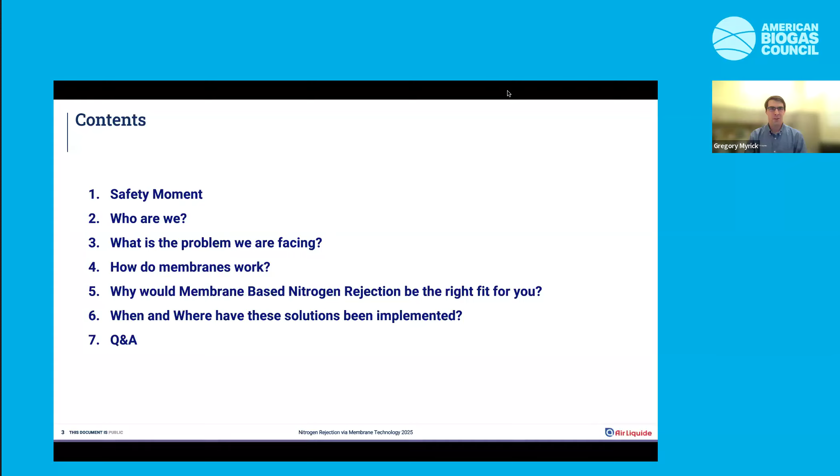Go ahead, next slide. Next slide.

So for safety in a landfill, flammability and fire is really our main challenge. You need 3 main things to start a fire. You need a fuel source, landfill methane. You need a heat source, a thermal oxidizer or a candlestick flare that's typically on site. And then you need oxygen. Oxygen comes from pulling vacuum on the well field and that air intrusion. So with the nitrogen that you're building, the oxygen is coming with it. And with that becomes a very serious safety risk.

So typically biogas upgrading technologies concentrate methane by removing CO2 and oxygen. In that concentrated CO2 and oxygen stream, you have the potential to create a very serious situation. So the dark blue dot on the right side is a typical landfill feed gas composition.

That blue line running through the flammability triangle is going to be air in the presence of methane. The bottom of that is pure air - 79% nitrogen, 21% oxygen.

So when you have air intrusion, you're taking that dark blue line and dragging it down to the bottom. When you see that dotted line go through the dark orange triangle, you are in a potentially flammable environment, which is really dangerous, because once you're in that flammable environment, all you need is an ignition source.

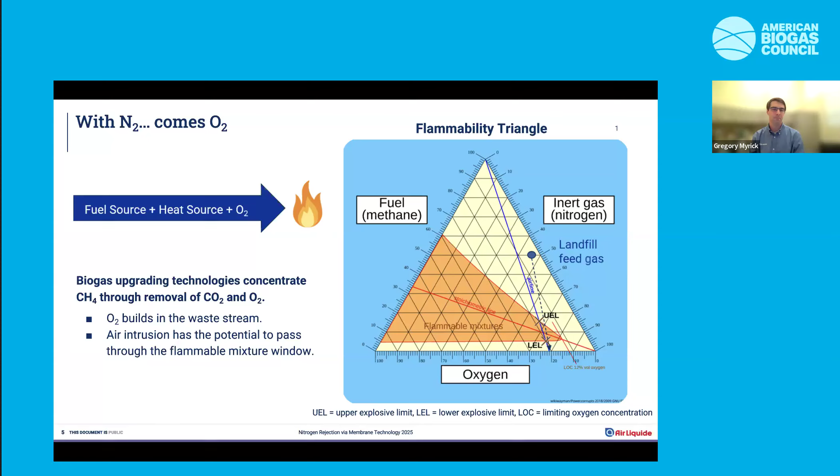Next slide. So a little bit about Air Liquide and why we're in the biogas space and how we're contributing to the environment.

At Air Liquide, we have a division called Advanced Separations. This is a membrane manufacturing and membrane solution development group for the industry, in biogas, natural gas, helium, hydrogen, and nitrogen mainly. We manufacture a hollow fiber membrane that's effectively the size of a human hair, but has a hole down the middle. I have an example here of one of our membranes, a little bit exploded, but fun to look at nonetheless.

At Advanced Separations, we develop our own fibers, new formulas, and membrane modules, as well as apply them to new technologies and applications wherever we can. Our research and development is here in Delaware, where I am sitting right now. We have over 37 years of membrane production experience.

Everything we manufacture that gets sent globally is manufactured here in the US. We have over 10,000 purification units in the areas I mentioned before: helium, hydrogen, biogas, nitrogen, and natural gas.

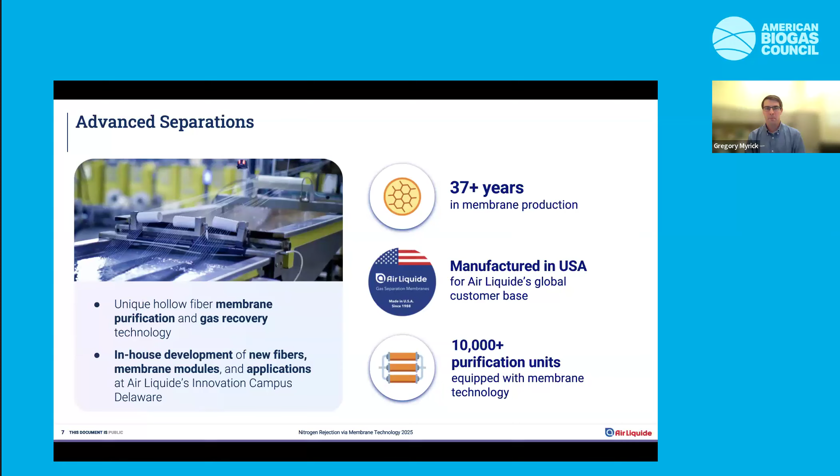At Air Liquide, we're really focused on driving innovations. Jonathan very graciously mentioned some of the innovations I've been involved in, but Air Liquide is very keen on how we can drive innovation in the market.

So our membranes are on land in a landfill, in the air, potentially on an airplane you've ridden on recently, and in the sea in an FPSO, which is a floating production storage and offloading unit for natural gas. Here are a couple of the achievements we've had in the last couple of years.

In addition to using AI in our manufacturing process and developing new membranes, we have our standardization initiatives, which you'll hear more about in the coming months, and which will really roll out fully next year.

In natural gas, we are focused on recovery of natural gas from oil refineries, and in hydrogen, huge improvements on recovery as well. For nitrogen and helium, we're focused on lowering the cost of recovery for both. And then there's the discussion we'll have today on nitrogen removal for biogas, with a lot of really exciting innovations coming out by the end of this year and next year in the biogas space that we're really excited about.

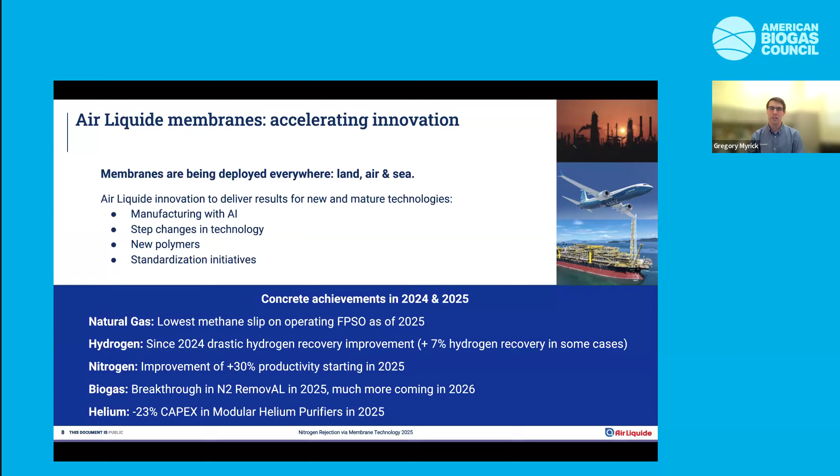At Air Liquide, we are involved in the whole circular innovation strategy - research and investigation here in our Delaware Research and Development facility, where we're developing new polymers.

That then goes to our production facility in Newport, Delaware, where we focus on lead time and ensuring product quality for our customers. We have an in-house engineering and design team, so we develop and design the skids ourselves and work on providing the best performance we can for our customers.

Then finally, we bring that into the field with our field service organization, which is focused on providing the customer the best membrane support that we can, tuning those membranes when they're running, and optimizing gas production.

What's really fun and unique about this strategy is we can use the engineering and design and the field service to feed back - where can we improve in polymers? Where can we improve in our engineered design? How can we provide the best value to the customer? Having that circular loop really helps us provide the best end result for our customers.

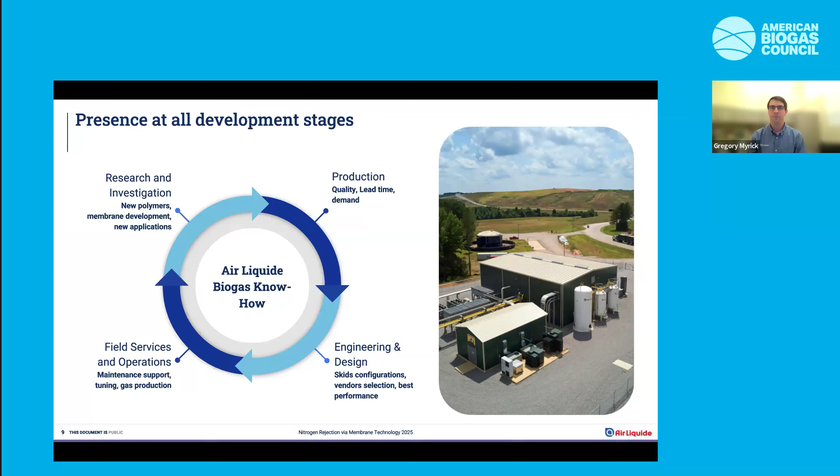At Air Liquide, we have over 250 worldwide references in biogas. Here are our references in North America, and we've been doing this for the past 20 years. All of these dots are sites where Air Liquide equipment is in the biogas space.

So we have yellow, which is the operating facilities. We have green, which is 8 facilities running with nitrogen removal technology. Finally, there's blue for sites in development, some of which have already started up. Then we have purple and red, which are our manufacturing facilities as well as our corporate offices.

So spanning across the US, I've been fortunate enough to be at a lot of those sites and try to help out and tune the systems as much as possible, and continue to grow this portfolio of projects, and hopefully add a few more of those green dots as we continue to grow this technology in particular.

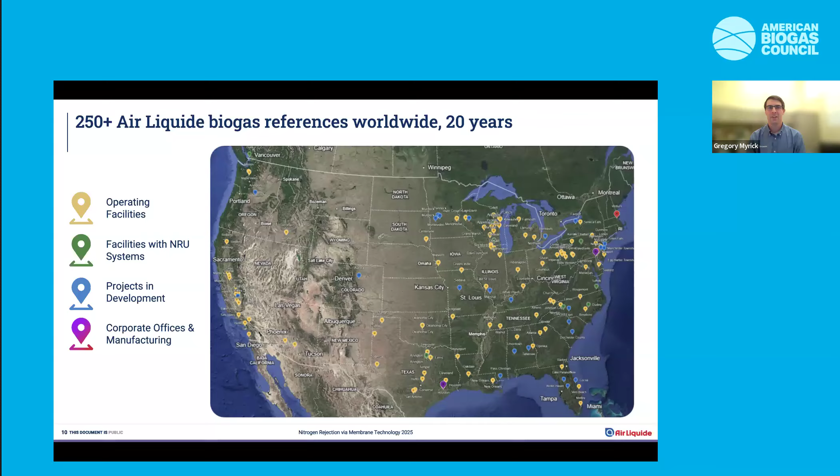So what is the problem that we're facing in the biogas space? It's really a nitrogen problem. Separating methane from CO2 is relatively easy—there's a lot of technologies that can do that. Separating methane from nitrogen is very difficult. So one of the biggest concerns and the largest CapEx and OpEx involvement in these projects is typically in nitrogen removal.

So where is the nitrogen coming from? It's really a landfill problem more than it is a digester problem. In a digester, you have better control over the nitrogen. In a landfill, it's a function of pulling vacuum on the wellhead.

There's a little picture from the EPA of a wellhead, and the example is: the cap that the wellhead is protruding through is pulling vacuum on the tube that's going down into the waste and drawing in the methane from the waste. So when it does that, if you pull too hard, it's also going to bring air from the atmosphere through the cap into that collection well. That's really where the problem comes from, as well as if you have an open landfill, the open face additionally brings in some nitrogen.

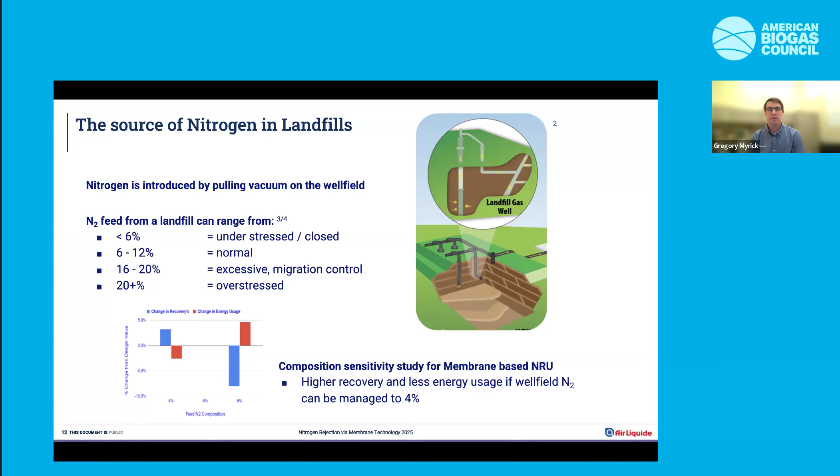So let's get into what are the commercially available technologies. Next slide, please. Next slide.

For a membrane, similarly, rather than pulling vacuum on the low pressure side, we need to boost the pressure prior to treatment, and that helps with CapEx considerations and keeping the footprint nice and small. So while it's similar in relation to the equilibrium PSA from a compression standpoint, the footprint is really the added benefit there.

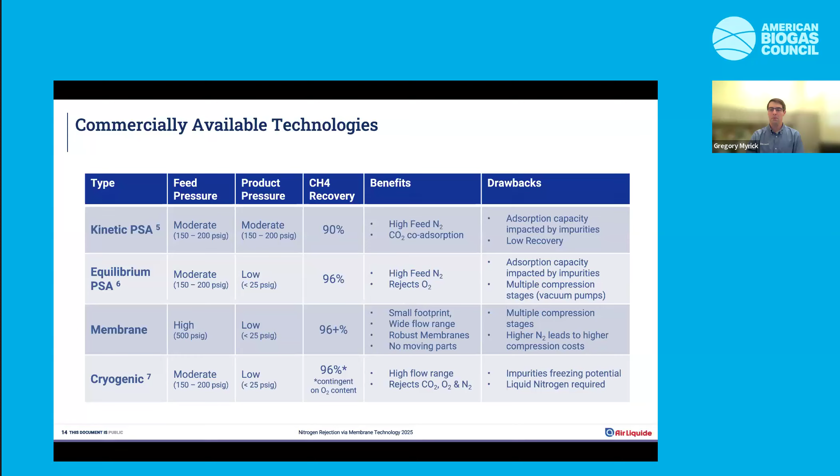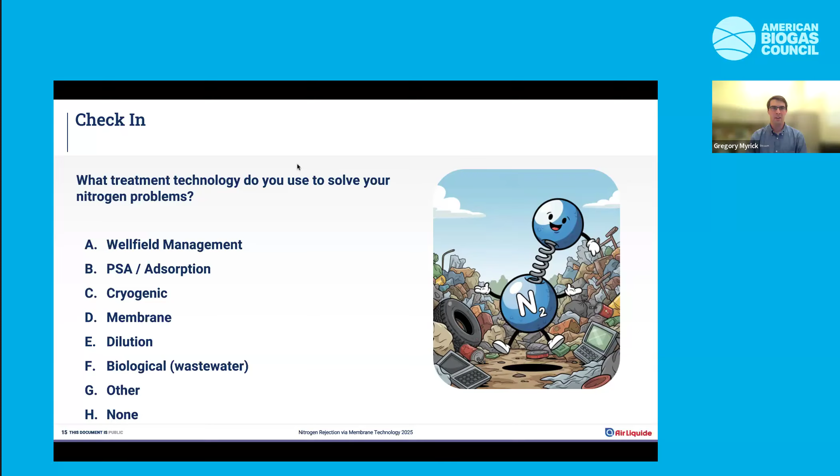Next slide, please. All right, so a little bit of background on membranes. We're going to touch on what is a hollow fiber and how does it work, and then specifically nitrogen removal membranes. Next slide, please.

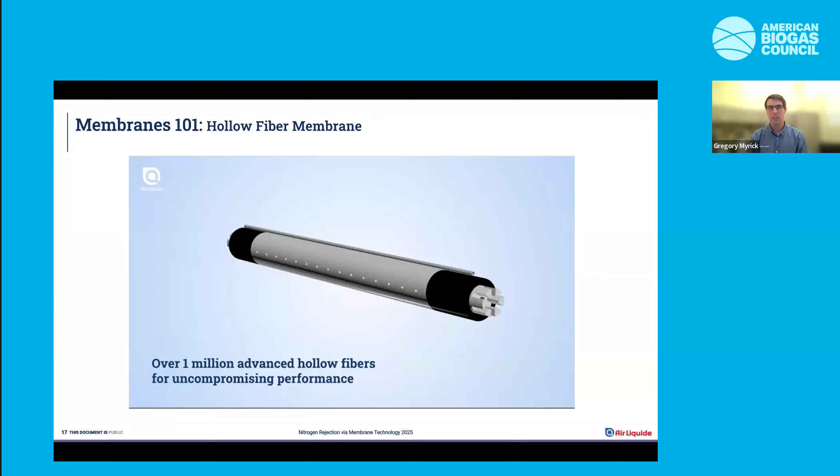Got a nice little video for you. So this video is specific to nitrogen solutions, but it is applicable to how a hollow fiber works. So we have this center tube, which adds structural stability, and then we wrap the membranes or the hollow fibers around that center tube. As I mentioned before, each one is the size of a human hair, and very small.

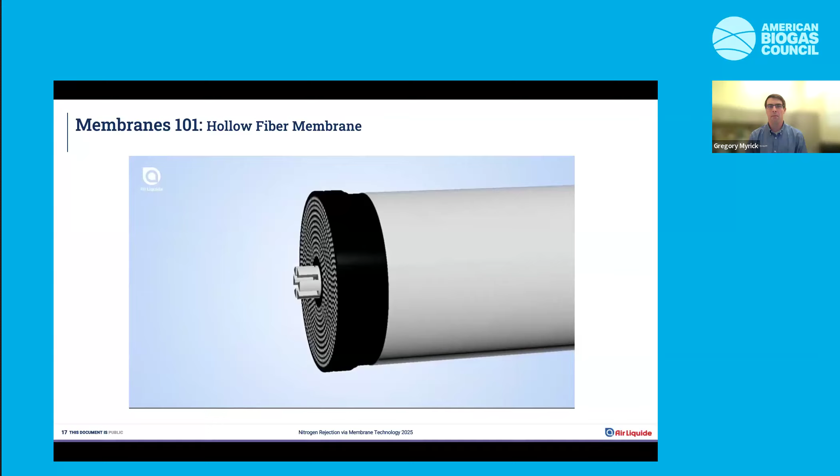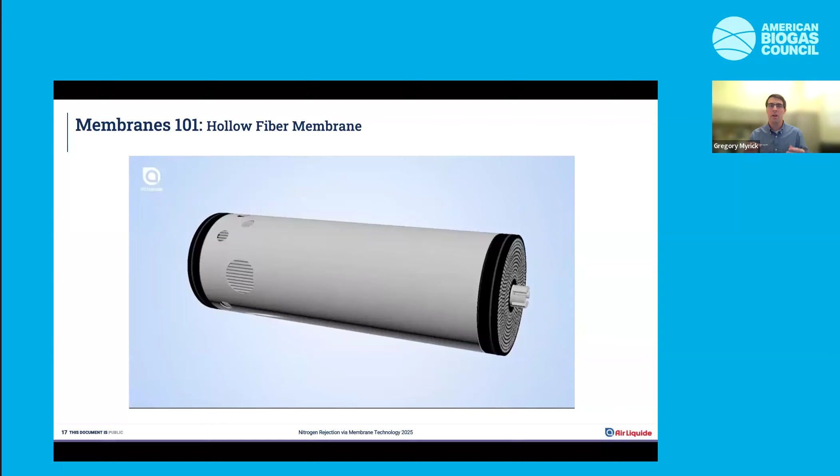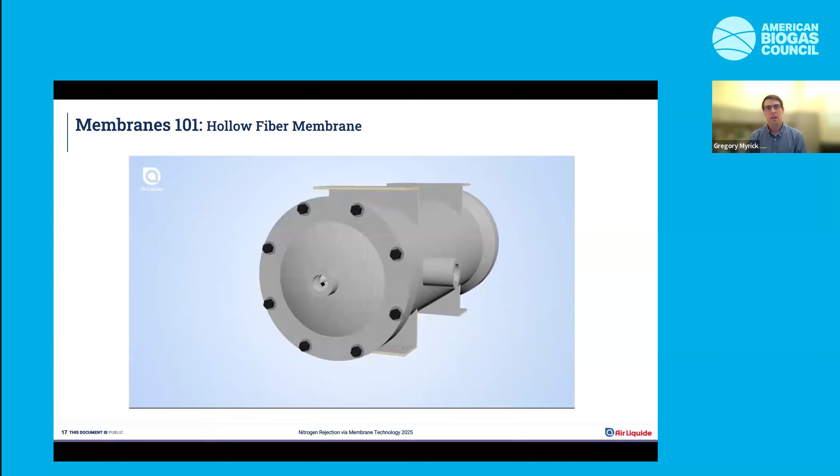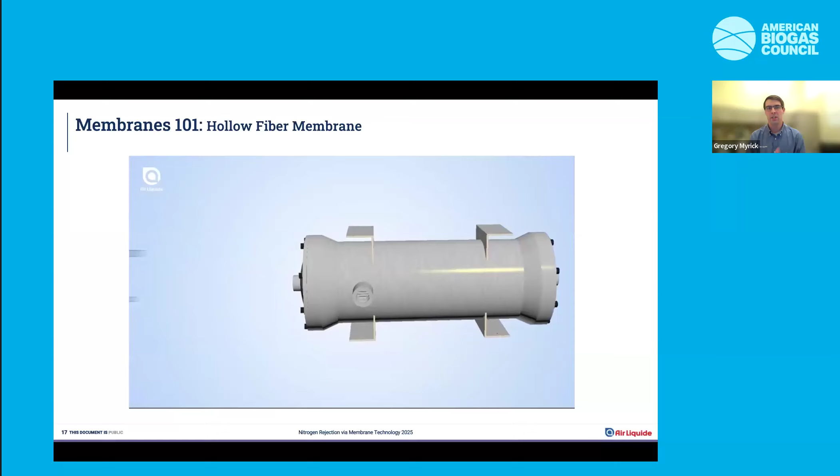Here we have O-rings that are keeping the high pressure side from the low pressure side. So the high pressure is going to go down the bore of the fiber, and then it will permeate across the membrane wall that's at low pressure. This is an example of our 12-inch housing that in some applications we can have up to 24 bar pressure. In biogas, you don't typically run that way. And then it's zinc chromate plated to improve corrosion resistance.

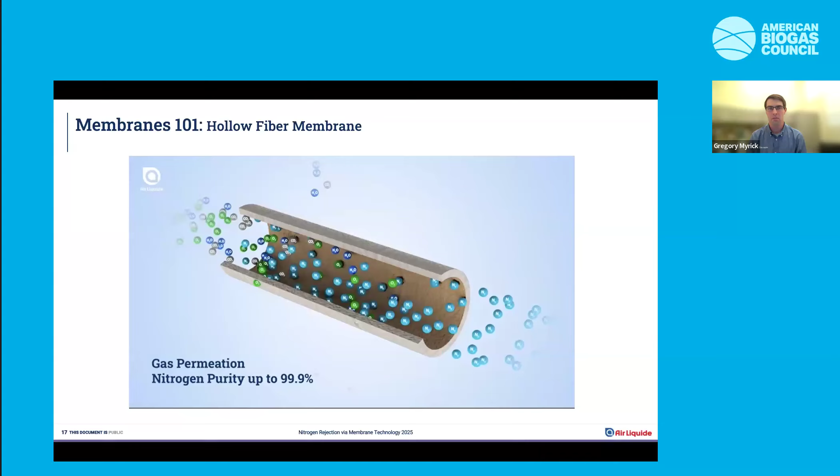So as we take a snapshot into a fiber, you can kind of see the gas is going down the bore, and then our fast gas, the example of a fast gas here, is going to pass through the membrane wall, and our slow gas is going to stay along the fiber. So I said this was air service, so the air is going to be our landfill gas. Nitrogen is going to be our methane gas in biogas service, and then O2 is going to be CO2 and oxygen that permeates across the wall.

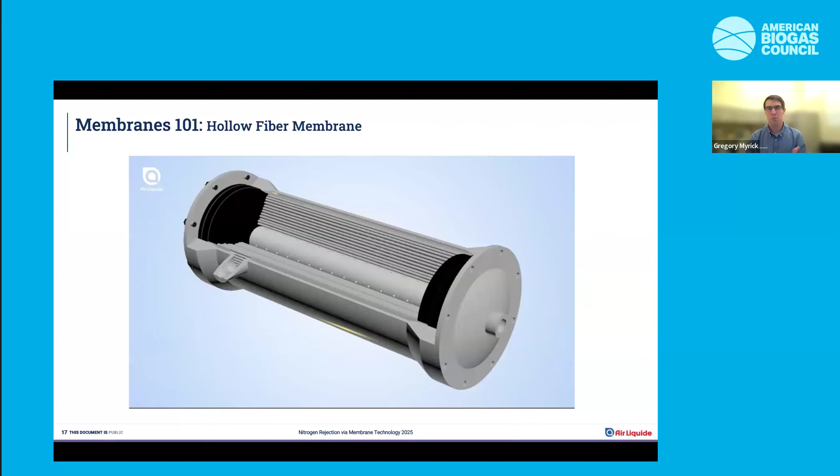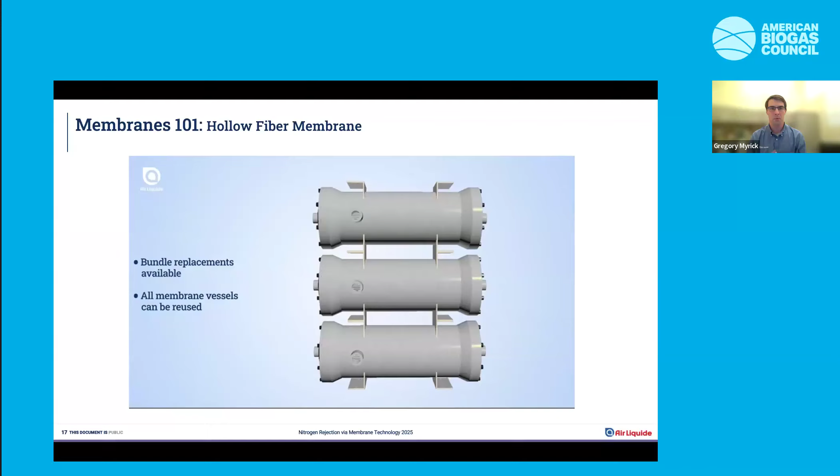But just to give you a flow dynamic perspective, the membranes are easy to replace how we've designed them. We have installations that have nearly 20 years of run life with the original membranes. Typically, we say 10-year membrane life, assuming proper pretreatment and protection of the membrane.

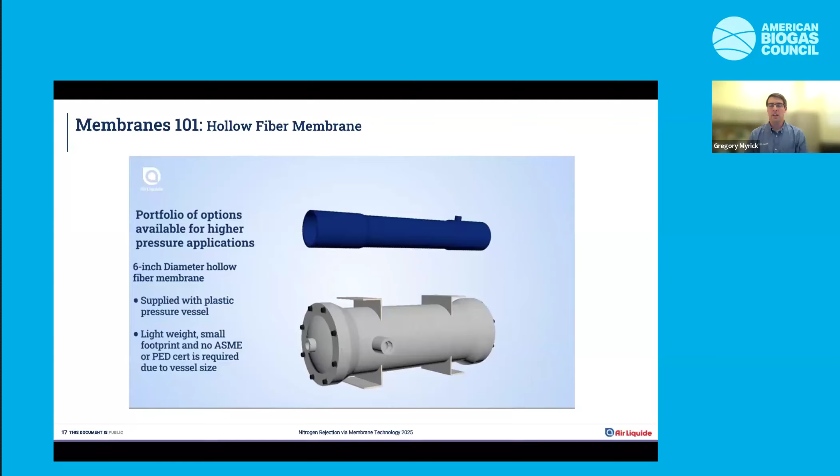We also have a 6-inch variation here. And so, wanted to highlight that with the proper pretreatment, you can keep these membranes for quite a long time. The 20-year reference is an Air Liquide owned and operated site that we've had since 2007, nearly 20 years. Next slide, please.

So how this differs slightly from our nitrogen removal membranes. Our nitrogen removal membranes are a polyether-ether ketone substrate. This allows us really great thermomechanical properties as well as chemical resistance so that it can sustain oil contamination, VOC contamination with no loss in performance. It allows the membrane to then operate with very little pretreatment and keeps that overall cost down. This was an acquisition that we had back in 2016, and we use a proprietary coating process that has best-in-class methane nitrogen selectivity. So it really reduces the overall power consumption by having that improved selectivity.

And so with that, touching back on the chemical resistance, we've had examples where we have flooded, the process has been flooded with oil. We've taken the membranes out, cleaned them, put them back into service with the exact same performance that they had on day one. So they are very resistant to these chemical attacks and VOCs. And that really helps at the end of the day in keeping your overall cost down. Next slide, please.

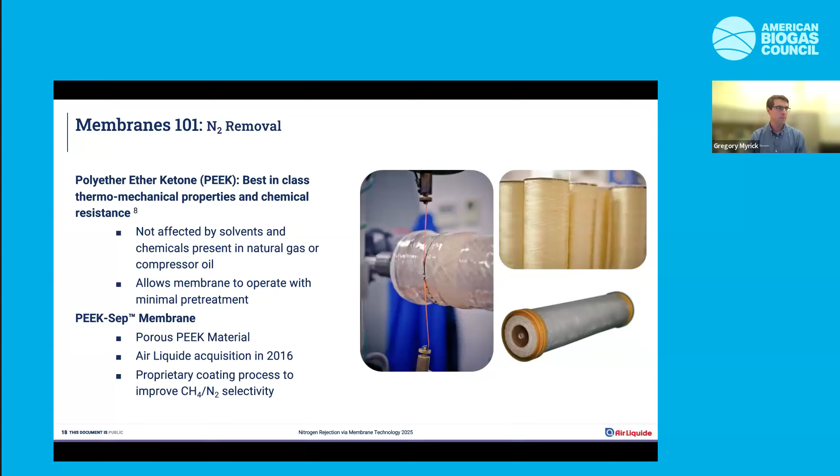So here we have kind of how does this differ from a conventional technology, conventional CO2 removal technology versus this PEEK-Sep product. So I was mentioning during the video that the fast gas is what's going to pass across the membrane wall, and then your slow gas is what's going to stay through. So in a conventional CO2 membrane, and there are many players in the market in this space, those membranes can't differentiate between methane and nitrogen. They're chemically too similar for a CO2 removal membrane. And so really we're counting on the fact that we can keep the methane at high pressure, and then the CO2 is going to very quickly pass across the membrane wall.

The difference with the PEEK-Sep products is that we can drive a wedge between the methane and the nitrogen. So we're flipping it on its head. It's keeping the nitrogen at high pressure, and we've swapped it such that the methane is now at low pressure, and we're really driving a wedge between methane and nitrogen.

A good point here is that oxygen is not shown on the graph. It will behave similarly to CO2 with these membranes, so it will permeate across the membrane with the methane. And in doing that, as you remove nitrogen, it will slightly concentrate, but not significantly. So it'll pass with the methane.

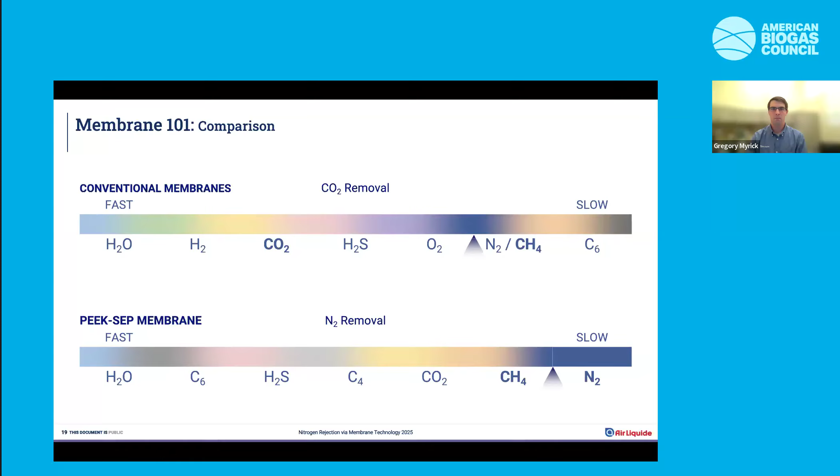Okay, so this poll is really a question of, did you pay attention? Through this presentation, this question has already been answered, so I'm excited to see how many of you are paying attention. How many fibers can we find in a 12-inch diameter bundle? Think about 12 inches in diameter. Do we have 5 fibers in there? 500, 1,000, 10,000, 100,000, a million, or 10 million fibers within a 12-inch bundle?

Okay, let's see where we're at. How many guesses? How many people have been paying attention? Majority of you, but not more than 50%. So 47%, it is a million fibers. It's about 1.2 million. 10 million would be really big. 100,000 is actually a very good guess, because depending on the fiber diameter it may change, and also depending on whether it's an 8-inch or a 6-inch bundle it may also change. So depending on the product line, where we have 6-inch, 8-inch, or 12-inch membranes, we have a variety of options for the application. Could be between 100,000 and a million.

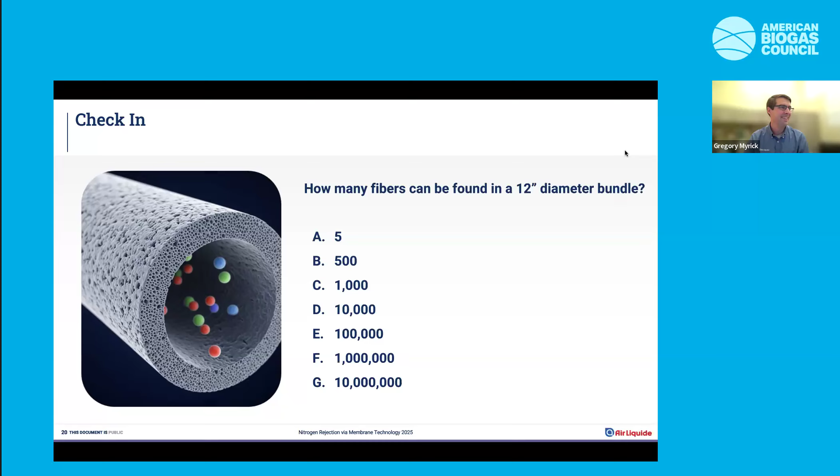All right, but majority rules, and the majority have been paying attention, so I appreciate that. Now let's get into why you're all here: the nitrogen rejection unit that we have at Air Liquide.

So we have a patented process at Air Liquide, the patent listed there and shown in the diagram below, where we are taking our landfill gas, processing it through a CO2 removal step. I like Air Liquide's CO2 removal step, but it could be any CO2 removal step at that point. You are concentrating up the nitrogen by removal of CO2, then compressing it up before going into the membrane stages. Again, we're compressing it to reduce our overall capital as well as the footprint, keeping the footprint nice and small, which works well for small landfills and landfills in general where you're space limited.

It goes through a 3-step membrane process. It leaves the high pressure side as nitrogen, about 70% content give or take, and it's a very low flow. Typically we see this used as a fuel gas or supplemental fuel gas for your thermal oxidizer. Then on the low pressure side, you have pipeline quality gas of less than 3% nitrogen, and that then gets compressed up into the pipeline.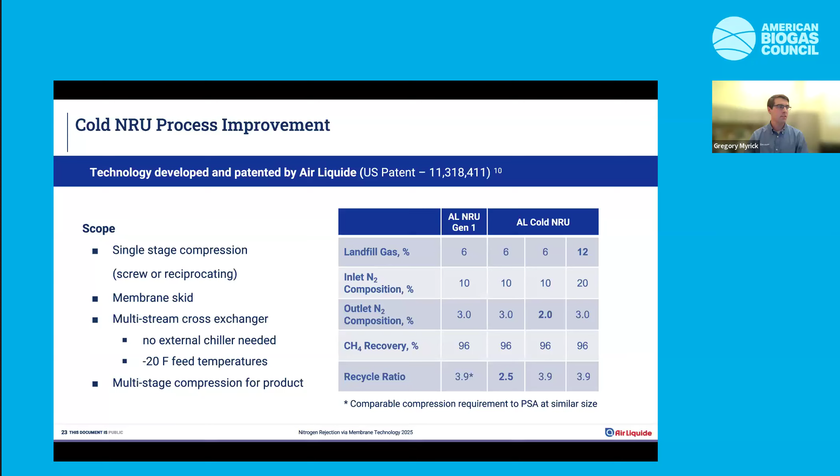So some of the advantages are footprint - I listed this before, 80% less than the standard PSA. Modular skid design really improves the space efficiency. It's a simple integration, which really reduces your installation costs.

The picture shown here is 1500 SCFM, but as you can see there's some expansion capability. The skid could likely process 3000 SCFM worth of nitrogen, and this was a 5% to 8% nitrogen case.

Really wide operating range from a flow perspective, from a composition perspective. It has the expansion capability, but then can also turn down - this could turn down to 25% of its feed capacity, which is a big driver for a lot of our customers today. And then I've already mentioned the contaminant resistance, but this is the skid you would get, and you don't need any additional equipment to protect that.

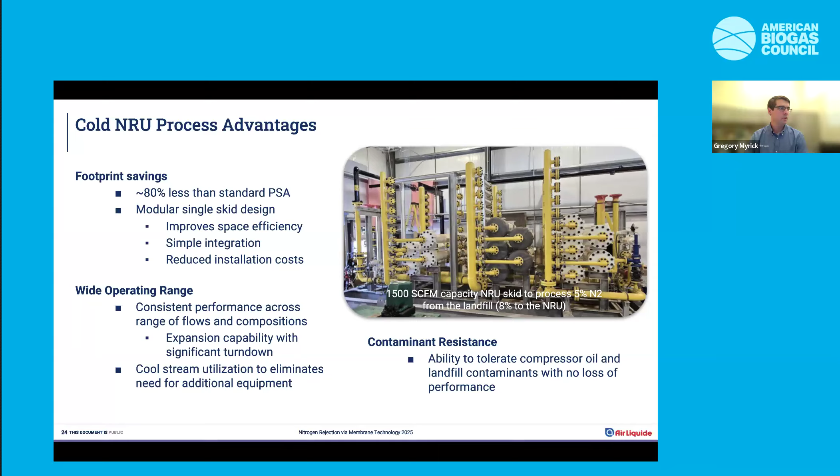So a couple of case studies that we have, wrapping up here. The first case study is the Air Liquide owned and operated Glacier Ridge landfill in Horicon, Wisconsin. 2600 SCFM, that's the skid that you see right there. It's been in operation since 2020 and has a total plant uptime of 98%.

That's total plant, not just specific to the nitrogen removal, which would then be higher than 98% for just that piece of equipment. In this example, we have 8% nitrogen in the feed, which gets 13% nitrogen to the NRU. It has greater than 96% product purity, as we are injecting into a 4% inert product pipeline, and then consistently 96% or higher methane recovery at this facility.

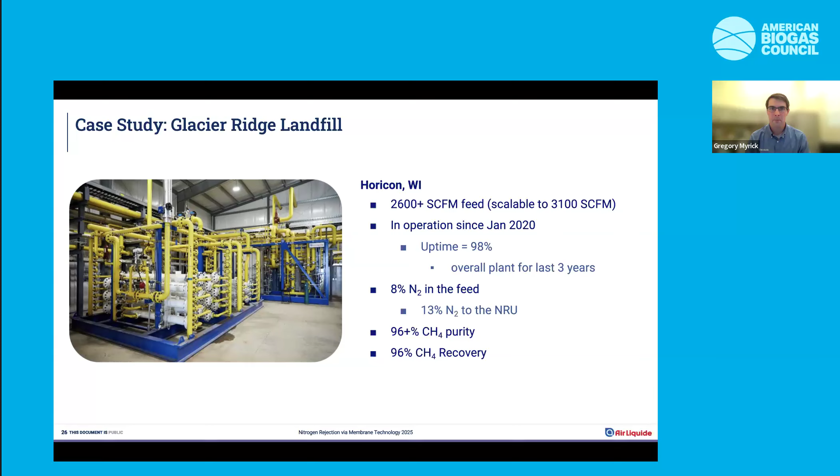We have 8 total references in the biogas space, and we have 1 in the natural gas space, which is the upper left, which is utilizing the cold NRU concept and has been operating since October of 2020.

Our first reference was in Arlington, Texas, so the technology has been in operation since 2019. It was the ABC Innovation of the Year in 2019 as well. I'm very thankful to the ABC for recognizing this achievement.

And one of the other really fascinating things about the Arlington facility in particular is that it is a mixed feed, coming from multiple landfills as well as a digester source. So they're able to tune in the nitrogen to what they need.

It's processing 4,000 SCFM, but scalable to 5,100 SCFM. It's got 6% nitrogen in the feed and 10% nitrogen to the NRU. Because it's generation 1, it had slightly lower recovery, but since then we've been improving the recovery due to process improvements as well as membrane improvements that we've been making since that was in operation.

So we're really excited about where this technology is going, and particularly how the cold NRU concept could take this and your project to the next level. So we're happy to discuss this with you, and ready to open the floor to questions.

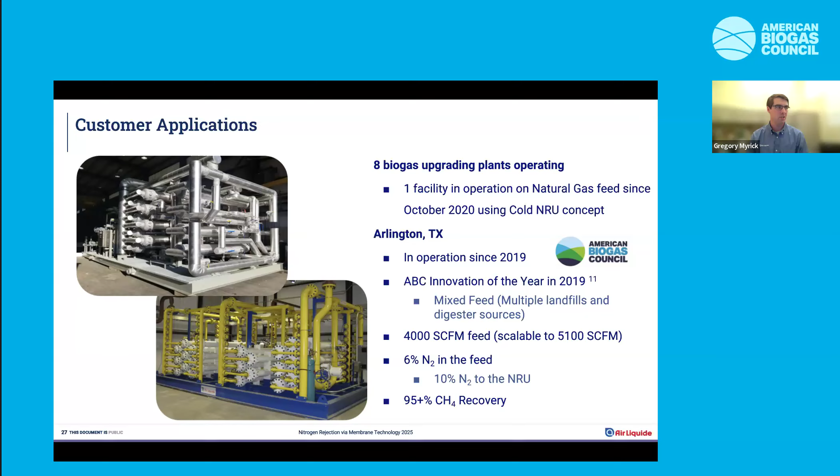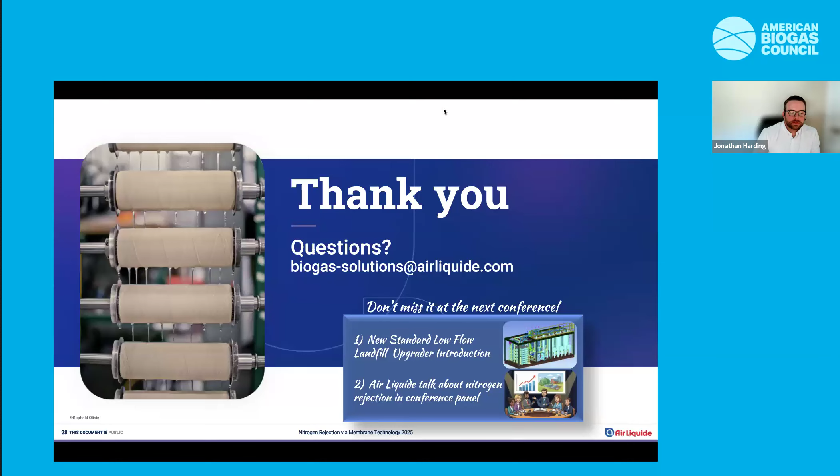The hollow fiber membrane manufacturing process looks quite tricky. How much more expensive are hollow fiber membranes compared to alternatives like flat sheet membranes? From a processing standpoint, the hollow fiber membrane is significantly more efficient than flat sheet. With flat sheet, you need a lot more surface area to process the same amount of gas flow. In our experience, flat sheet has not been cost effective in this space because of the amount of area you would need, particularly related to nitrogen removal.

Next question: if PSA and cryogenic can remove CO2, O2, and nitrogen while membranes can't, why would someone choose Air Liquide's membranes when all those are in the gas? It's a great point. Regardless of the technology, not one technology can remove CO2 and nitrogen together within one process unit. There are PSAs that remove CO2 and PSAs that remove nitrogen, but not a single PSA that removes both together, so you have two unit ops in that case. In the cryogenic case, you still need to remove the CO2 prior to cryogenics, so you have a PSA to remove CO2 in that example as well.